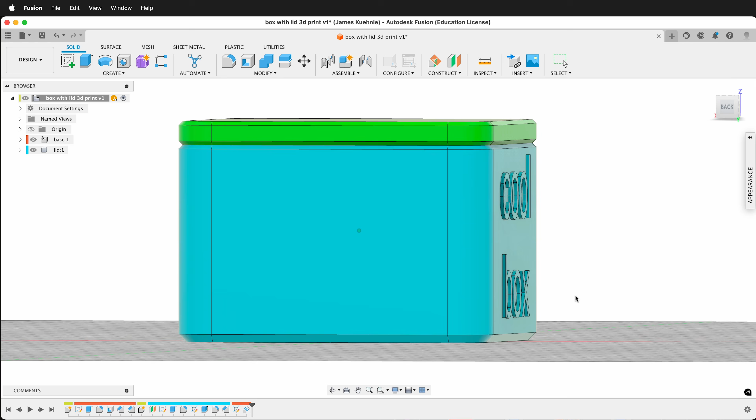In this Fusion 360 tutorial, I'm going to show you how to quickly model a box with a lid that insets inside the box for 3D printing.

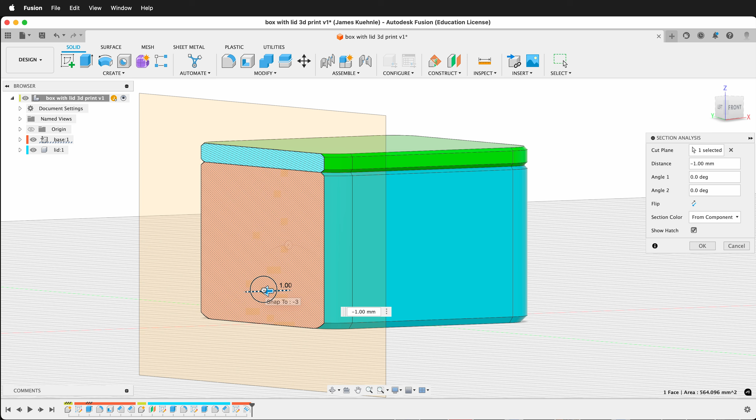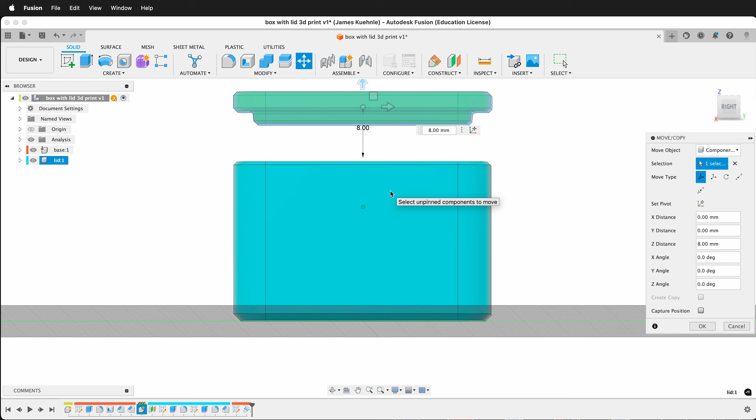Fusion 360 is great for making 3D printed parts like boxes because it's a parametric modeling software. It's also important to keep in mind some guidelines for designing 3D printed parts. Unlike traditional manufacturing processes such as injection molding or machining, with 3D printing we can make much thicker parts. So we can use the internal structure and the skin on the outside, the walls of the 3D print, to give it a lot of strength. It's kind of like having a truss. Rather than having super thin parts, we can make thicker parts and not have any shrinkage, and also have stronger parts. So we're going to do that with this box.

This is an exercise, so the scale will be really small so many student projects can fit on a single print bed, but you can make this box any size you want and just change the input dimensions.

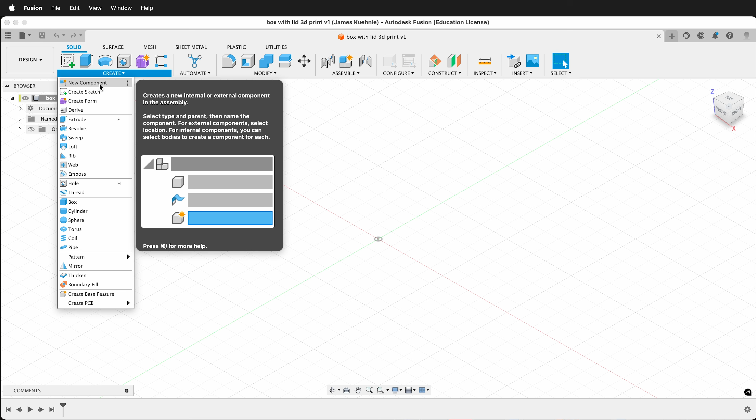To get started, we're going to use rule number 1 in Fusion 360: create a component. Create new component, name the component base, and then select OK.

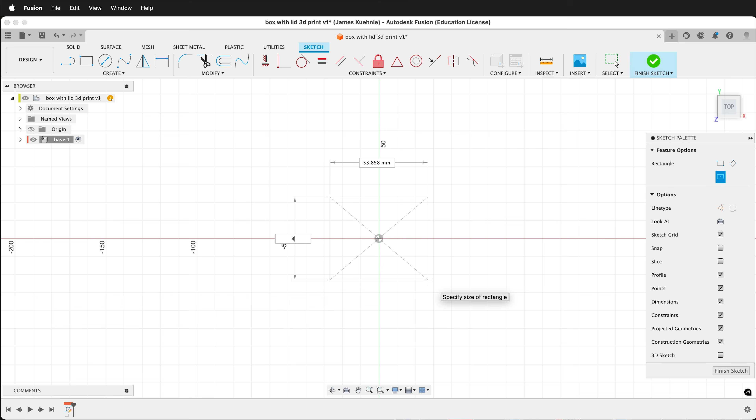There are many ways to create a box. In this particular case, we'll use the sketch method. So select Create Sketch, select the ground plane. Then under Create, select Rectangle, Center Rectangle. Click the origin, then move your mouse and type 40, tab, 40, enter. So now this sketch is 40 millimeters by 40 millimeters.

We'll press E to extrude, and you can rotate a little bit to see what's going on. And in this particular box, we're going to type 25. It's important to remember the number 25. Normally I would put this in parameters, but since this is a beginning exercise, we'll just remember it for now and be able to change it later.

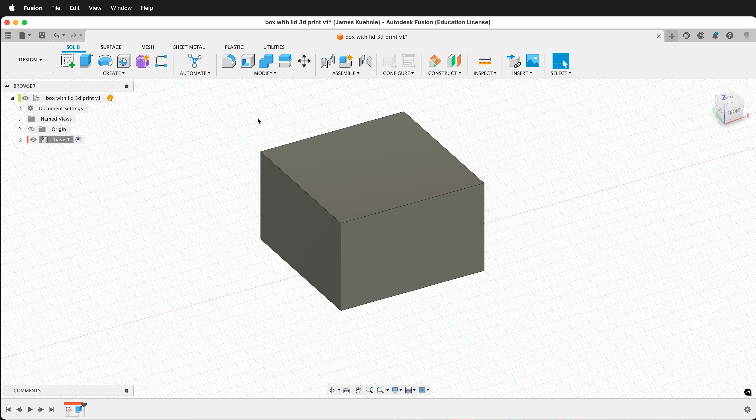Next, we'll add some rounded corners to the box. Your 3D printer will appreciate not having these sharp edges on the side, and the box will look nicer. So click the fillet icon right here, then select all of the outside edges. In Fusion 360, you can select through like this, or you can hold Shift and orbit around and select like this. It's the same thing. Then type 5, press Enter. So now we have these nice rounded edges.

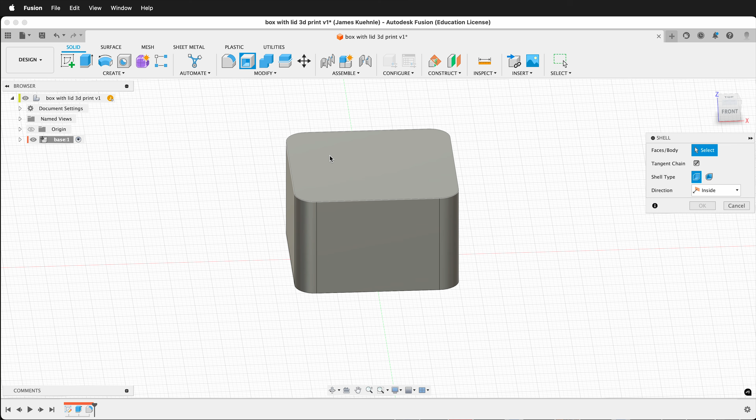Finally, we're going to go ahead and shell the box. I'll click Shell under the Modify tab, then click the top face, and I'll press 3. So this is a 3 millimeter wall. We might think 2 is a better dimension, but remember, we can make it thick and it'll be extra strong, and there won't be much added weight or material.

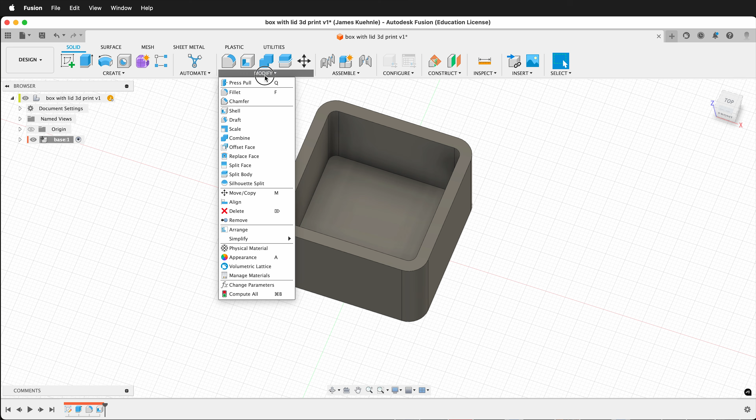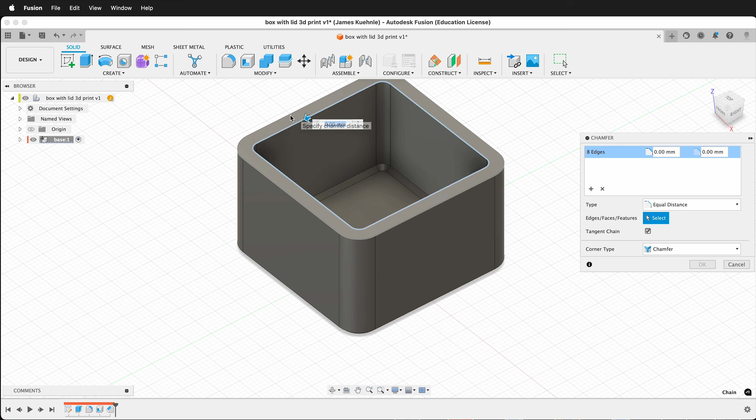And lastly, for the base, we want to add a chamfer on the inside here. So I can go to Modify, Chamfer. I'll select this inside face and the outside face here and type 1. Now that has a nice strong chamfer. Press OK. And the only remaining hard edges are right here on the top. Once again, I'll modify chamfer, select both of these, and then type 0.5.

This completes the base of our 3D printed box. We could put some embossed text around the outside, and I'll show you how to do that at the end of the video.

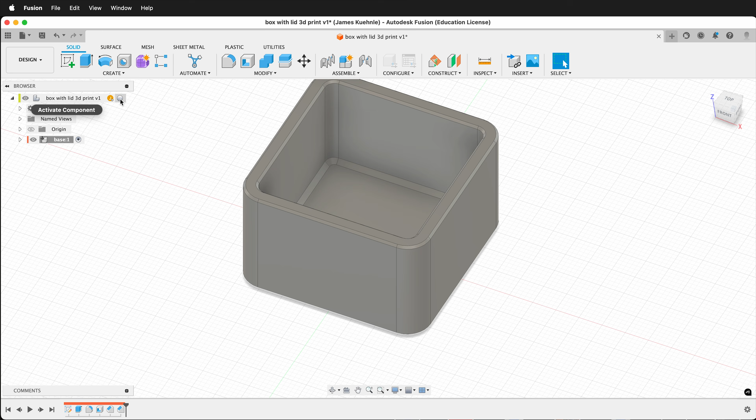Next, go ahead and click the top level component. Remember, in Fusion, on the browser, these little circles indicate the component that is active. So if I click this component, the top level component is active. If I click the little circle by base, base is active.

Rule number 1 in Fusion 360 says always make a component. So I'll create a new component and I'll call this lid. When you make a new component and you have the other component activated, notice that the previous component is transparent.

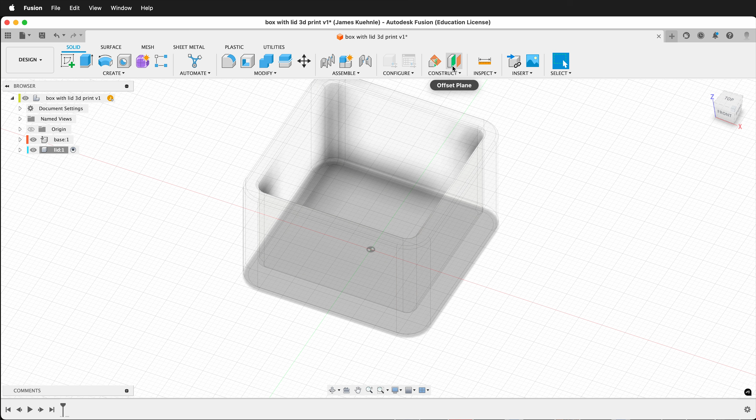To make this easier to work, and so we can change things independently, I'm going to use an offset plane. So this is under Construct, Offset Plane. Then I'm going to click this bottom face. Sometimes it's hard to select, so if you click and hold and then let go, you can select the different pieces. And I want the XY plane. Then my offset will be 25, because that's the height of the box.

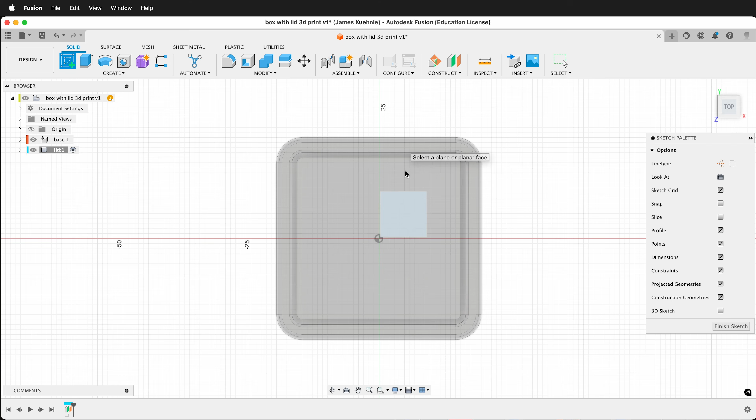Then I'll press OK. Next, create a sketch on this offset plane. So this sketch is up in the air, you'll see that once we draw the sketch, but it's up in the air on that construction plane. Once again, get a center rectangle, click on the origin, and then type 40, tab, 40, enter. And when I rotate, you see how the sketch is up in the air and not down on the ground.

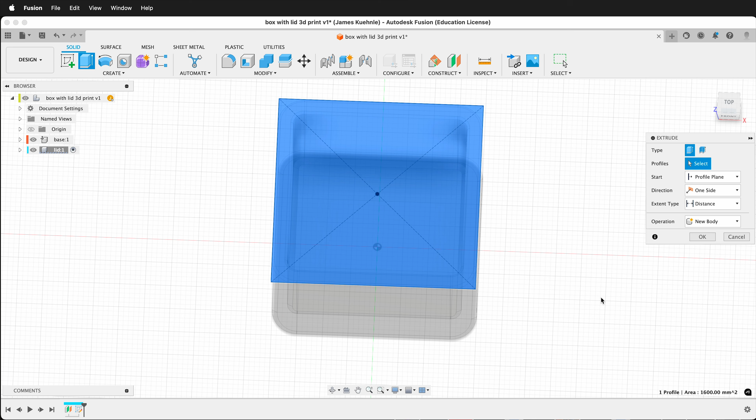Then finish the sketch, press E to extrude, and for this, let's go ahead and go up 3 millimeters to match the wall thickness.

Once again, click the Fillet command, then select all of the outer edges and press 5 millimeters. Now that is nice and filleted.

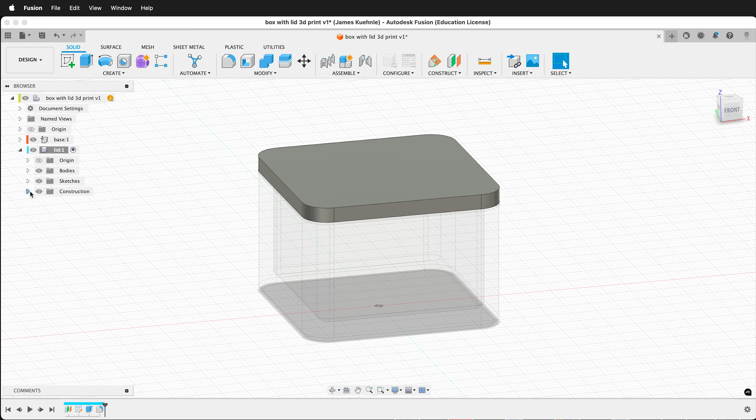Then we want to make one more sketch on that construction plane. By default, once you use a sketch or a construction plane in Fusion 360, Fusion hides it. So in the outliner, you can twirl out these little triangles, select the plane, and select it again. I'll say create sketch. Remember, I can select through by clicking and holding, then letting go. I want to select plane 1.

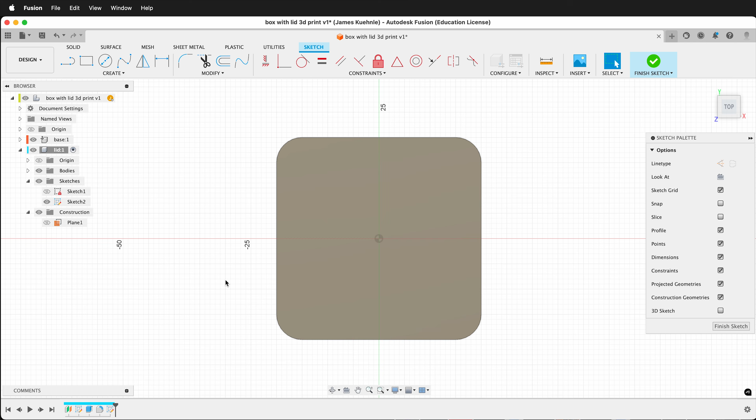Instead of drawing a rectangle, I want this rectangle to be related to the inside dimensions of the base. So for now, I'm going to hide the body in the lid. So this is the base.

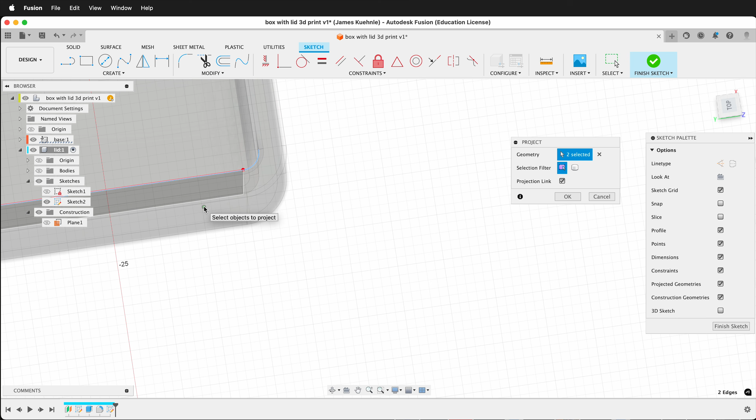If I press P, this brings up the project menu and I can project geometry. What I want to project in is this outside edge right here, this lip. So right on the edge here, I want to get this lip, and then I can go all the way around and get those pieces. Now I have all of those sections of the lip.

If I press OK, it projects those lines onto my sketch. As you can see, these lines are up in the air on my sketch.

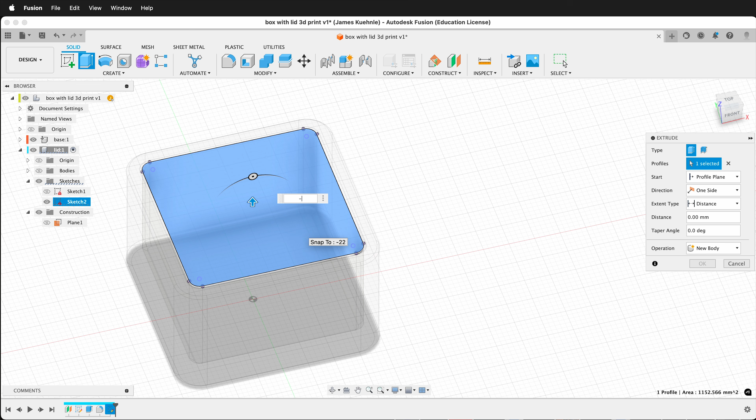Then I can press E to extrude, and this time I'm going to type -2. This will make a part that goes down, but it gives me a warning, because I hid the lid. So I'm going to bring back the bodies so I can see what's happening. As you can see, this is going down, but notice it goes down straight. That's going to make for a very tight box.

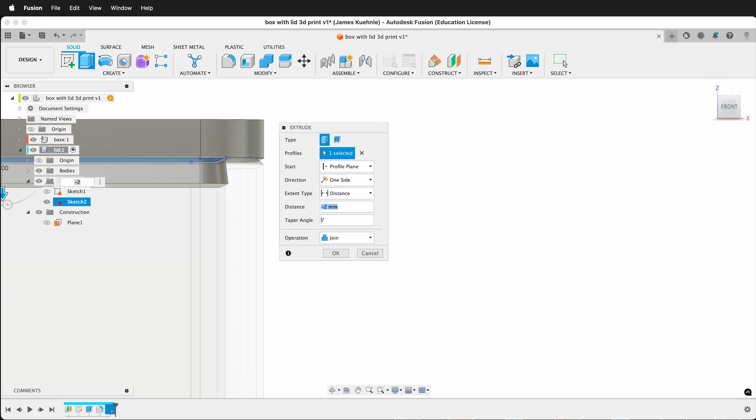Over on the extrude command, I can type in a taper angle. Sometimes it's hard to know which way to taper, so what I do is always type in a big number. So it's 7 - that obviously tapers out. That means we need a negative number. So if I type -7, that tapers in pretty hard, 7 degrees.

That'll help that fit on better, and you can adjust this depending on what you need. You can go -5 if you think that's enough taper as well.

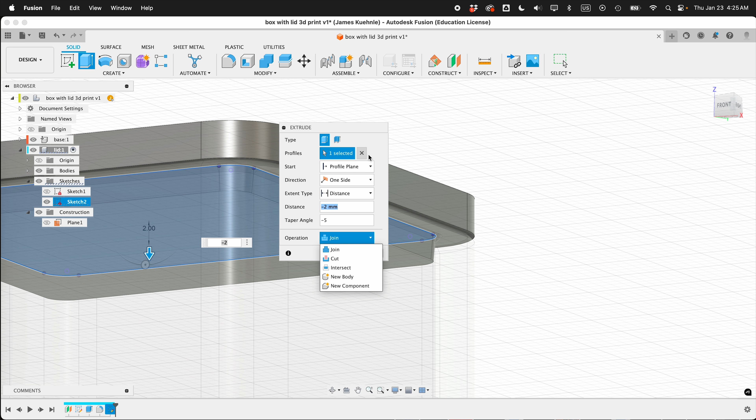The important thing is under operation, we want to join, so it's going to join to the lid. I have the lid component activated. This is the only body in the lid, and this extrude will join, so now there's still just one body in the lid.

For now, I'm going to go ahead and hide the base because we need to add some fillets and chamfers to the lid. First, I'll add a fillet. I'll click Fillet in the Modify menu, select this edge, type 0.5, and press OK.

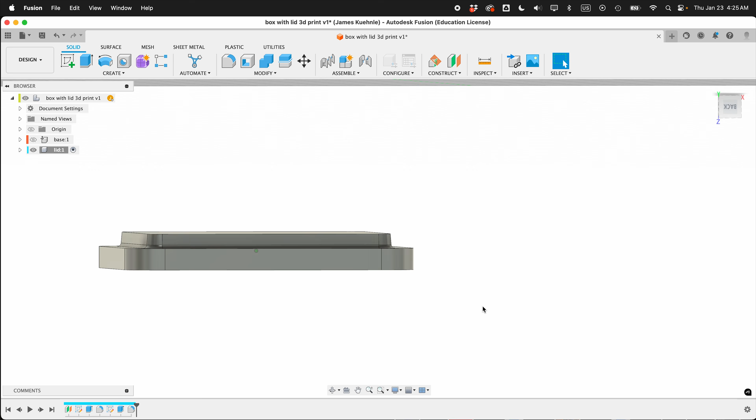And lastly, I want to add a chamfer. So Modify, Chamfer. I want to select this top edge, this edge going around the lid, and then the bottom edge here, and we'll just go 0.5. Adds a nice chamfer on all those pieces and press OK.

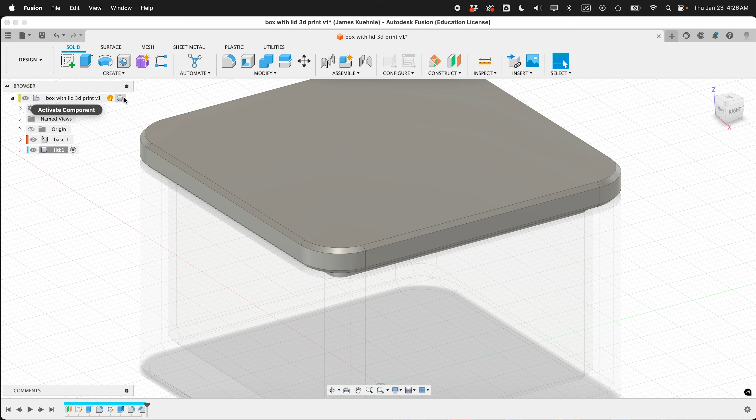Now we can bring back the base visibility. Notice it is still transparent, but if I select the top level component, now I can see both pieces. So now we have a really nice box and it should be fitting together nicely.

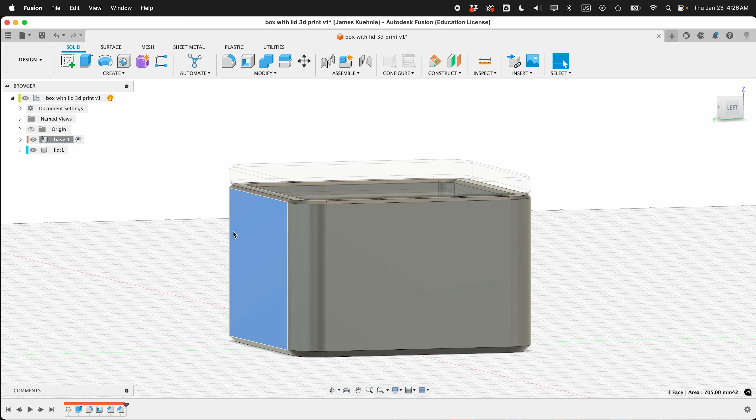The next thing I want to do is potentially add some customization to the box right here. So if I want to add text going around the outside, I want to activate the base. Notice if I click the base, the lid becomes transparent. If I click the lid, the base becomes transparent.

In Fusion, before doing any operation on a component, you always want to activate the component. Yes, you can work from the top level, but then it's going to make a messy timeline. So we want to always try to activate the component we want. So I have the base activated.

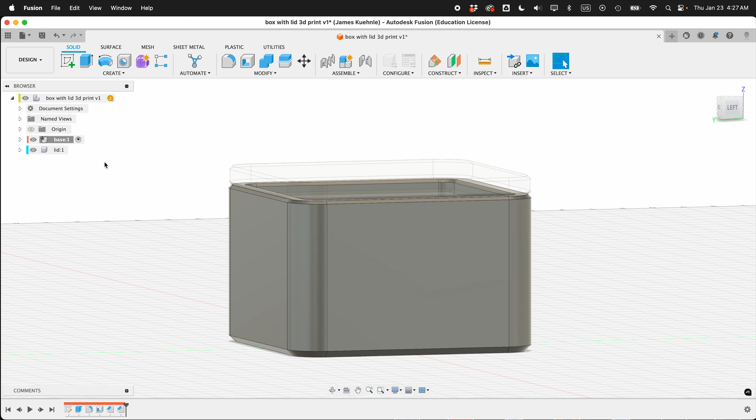I'm going to create a sketch, right on the face of this. I could create it on this plane there, but I think I'm going to do it right here. Then I'll create text, draw a rectangle, and I'll type in 'cool box'. Then I'll have both of those centered, press OK, and then I can move this to where I want.

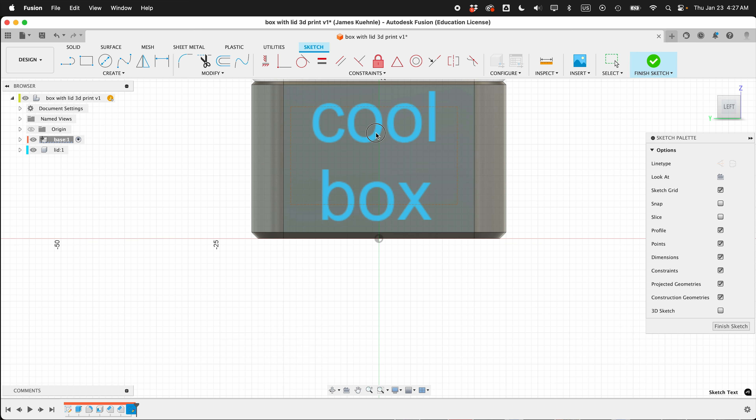Finish my sketch. Lastly, on the create command, I can select emboss. It asks what sketch profiles - I'll select cool box. What faces? I'll select this face, and then the effect will be to come out.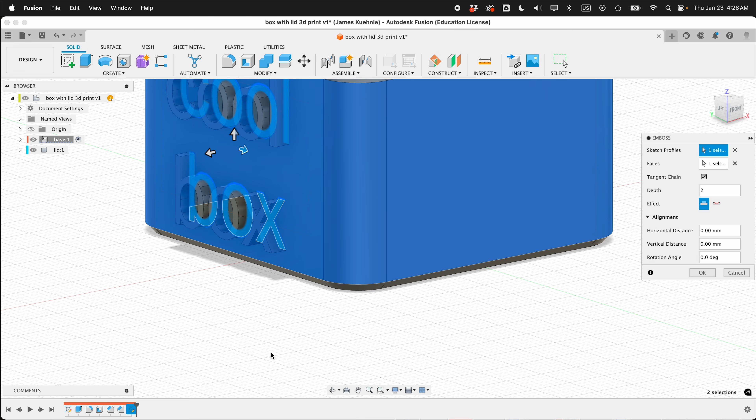By default, it's usually something like 2 millimeters, which is really far - we don't want something to stick out of the box 2 millimeters. 3D printing works well in multiples of 0.4, so you can go 0.4, or if you want a little bit deeper, you can have it 0.8. Remember, you can go inside to cut away from the box, or outside. I think I'm going to have it raised 0.4 and then press OK.

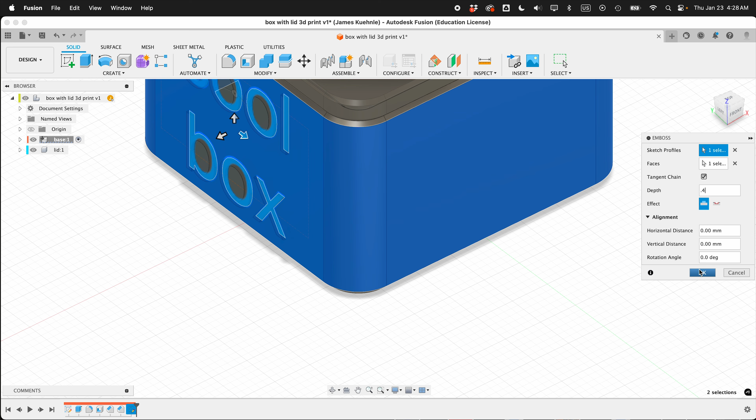So now I have some text on my cool box. I'll go to the top level component. Make sure you save your progress. And now this is ready for export to your 3D print slicer. Happy 3D modeling.